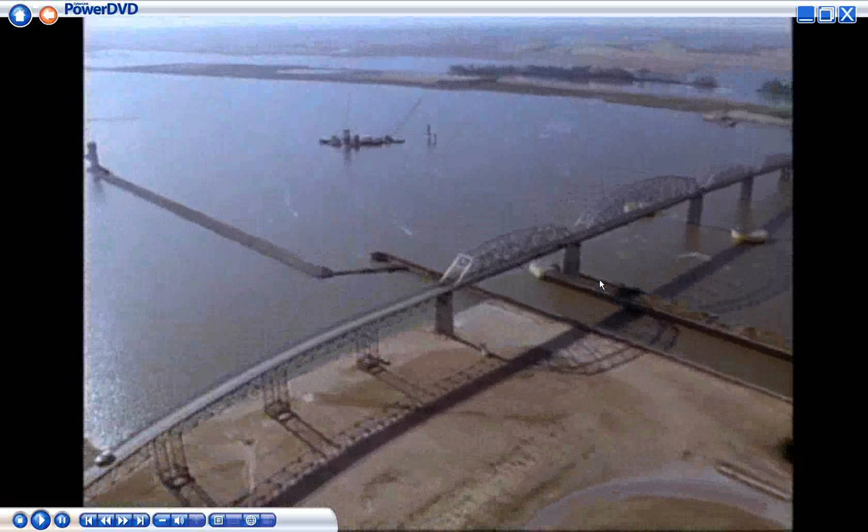For nearly 70 years, the old Clark Bridge was the most direct route from Alton, Illinois to St. Louis, Missouri. But the old bridge had become a bumpy traffic bottleneck. Everyone agreed a new bridge was needed. Building a bridge across the mighty Mississippi would require expert project management skills.

Projects are special operations designed to accomplish a set of objectives in a limited time frame. Managing projects involves identifying tasks, making time estimates, projecting resource requirements, and preparing budgets, then monitoring progress and revising plans as needed.

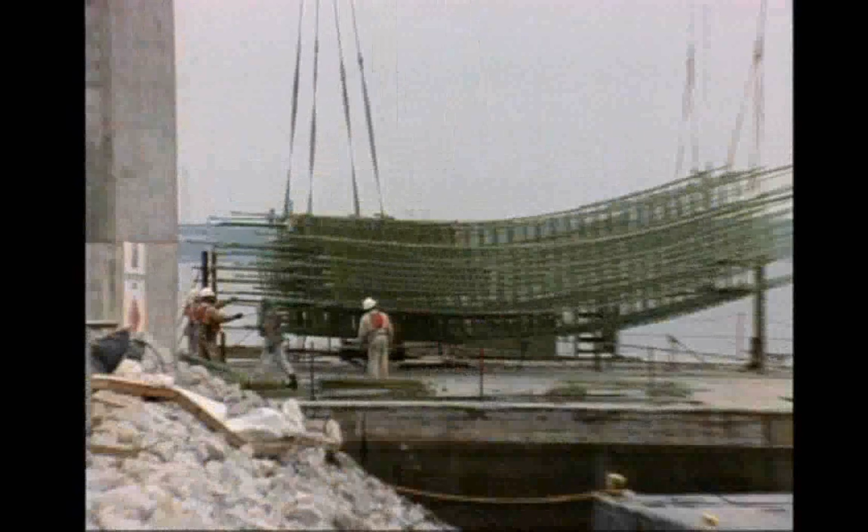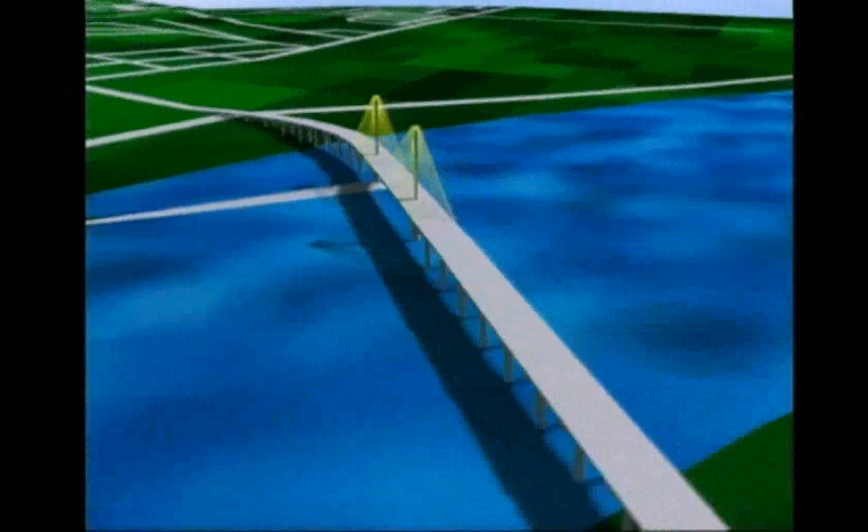Effective scheduling techniques are vital to the success of such a project. Time is money, and the state of Illinois underscores this fact with a $4,000 per day late penalty to its construction contractors. It's also important to organize tasks in the proper order to ensure the project's success.

This project began with the bridge design. The designers chose a cable-stayed span bridge for its strength and low cost. It's a design that had never been attempted quite like this anywhere in the world.

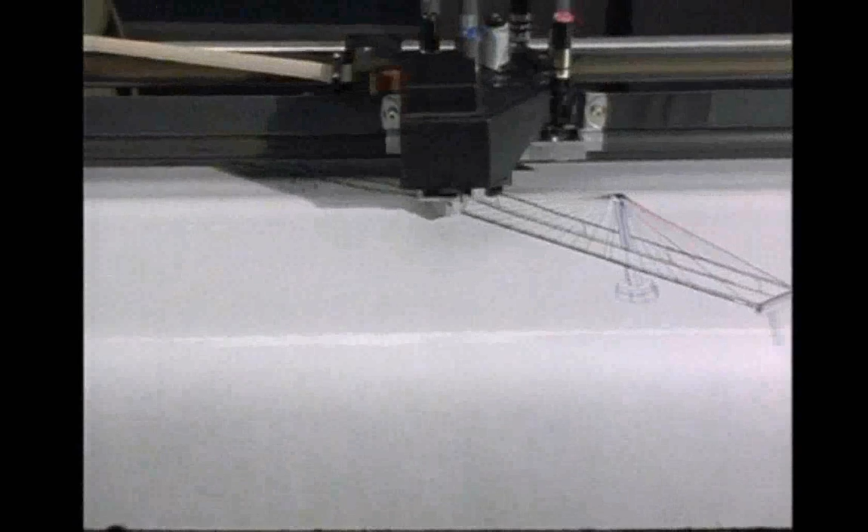Before construction could begin, the state had to break down the job and award contracts. Work breakdown structures help project managers determine exactly what needs to be done so that they can estimate how long it will take. A hierarchy of activities is established.

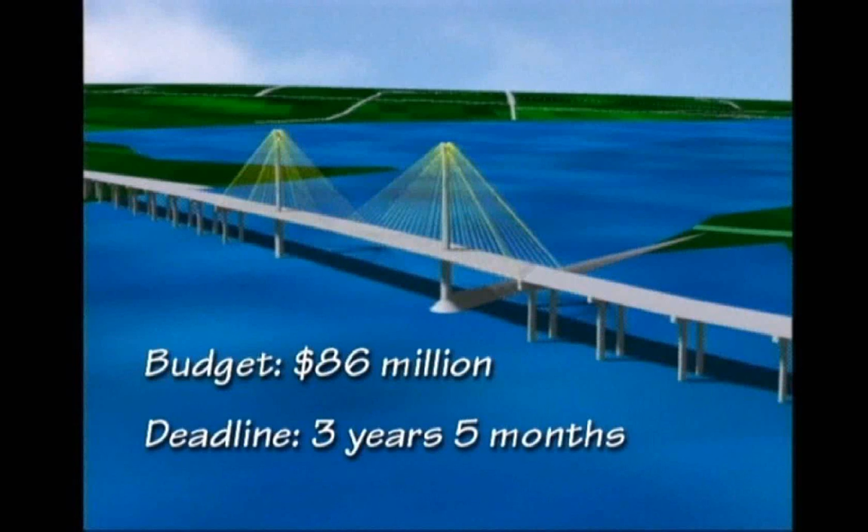In this case, the state divided the bridge up into sections and awarded each section to a different contractor, which encourages more competitive pricing. The total budget for the bridge was $86 million, and the deadline was 3 years and 5 months away. Bridge construction presents special challenges.

Working over water is one of the toughest things you can do. You have to plan every morning, which we do. We meet every morning with the staff for just a few minutes because you can't just walk out and take something or drive out and get somebody. Everything has to be maneuvered by tugboats and barges.

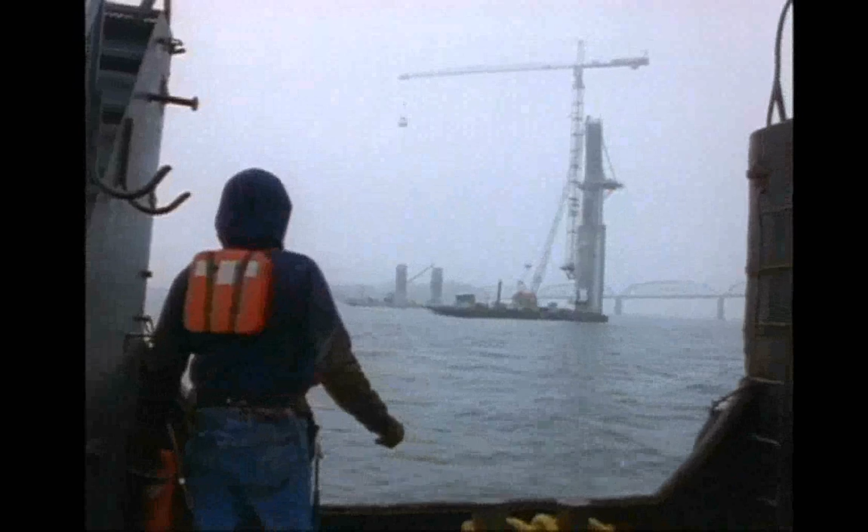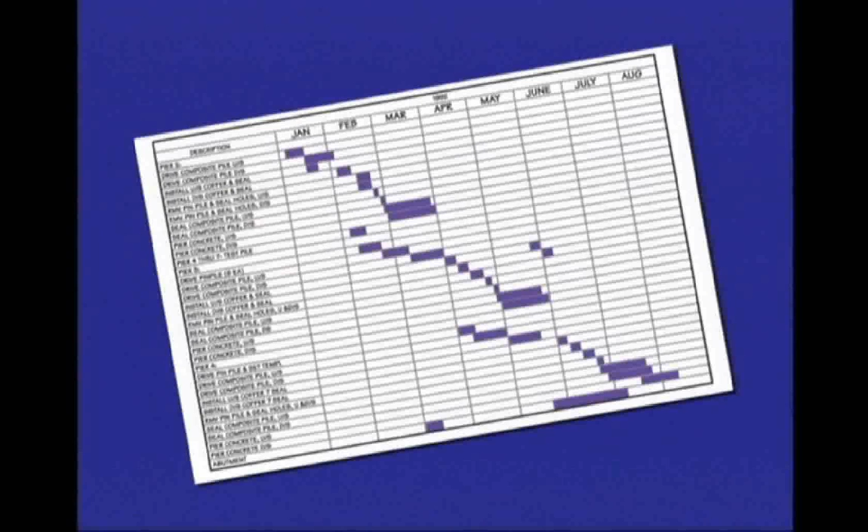When undertaking such a large project involving thousands of tasks and multiple contractors, scheduling becomes a critical element. One of the most popular techniques for scheduling is a Gantt chart. The Gantt chart uses layers of timelines indicating activities, durations, and dates.

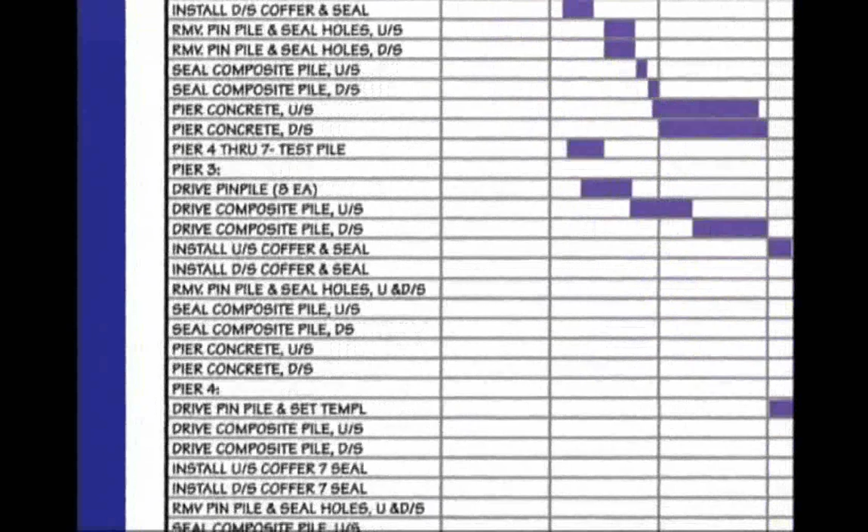This Gantt chart was created by Massman Construction to schedule work on the Missouri approach. The state of Illinois required each contractor to submit Gantt charts in their progress reports.

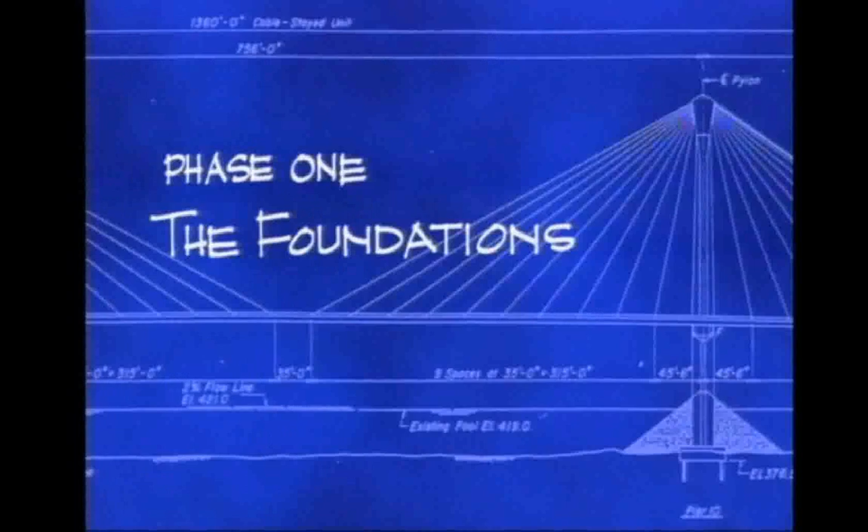Construction of the bridge began in the center of the river, grounding a foundation frame and enclosing it with steel walls to create an enclosure called a cofferdam. Then it was filled with reinforcing steel and concrete.

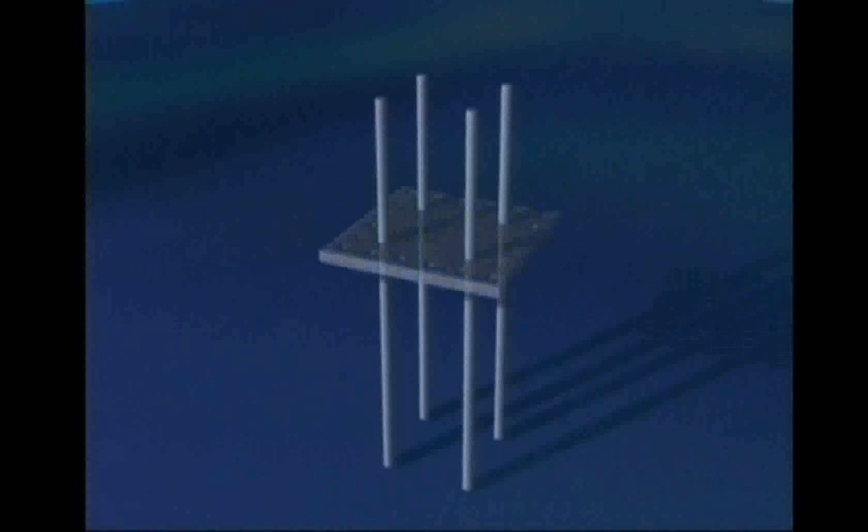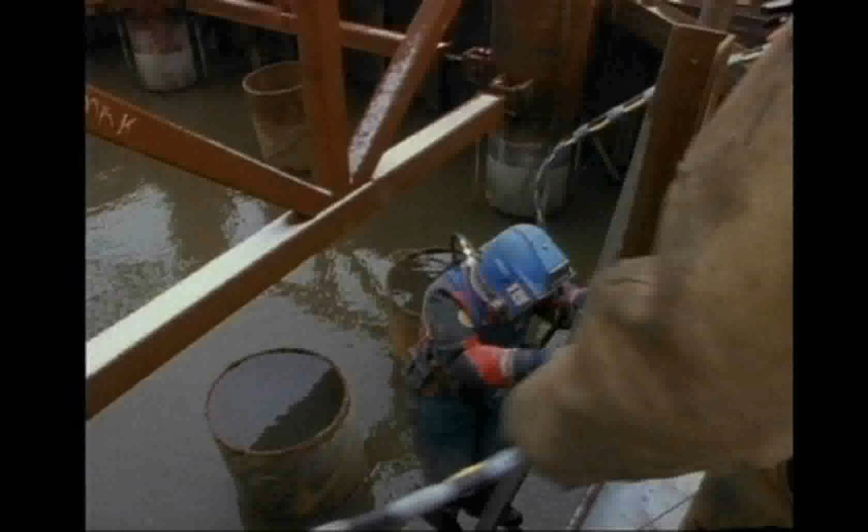The Missouri approach required a rather unconventional foundation, one built on stilts to avoid the dangerous high pressure in the deeper water. Unusual tasks like this are more difficult to schedule and budget, especially when so many unforeseen things can go wrong. The holes in the bottom of the cofferdam needed to be plugged by divers.

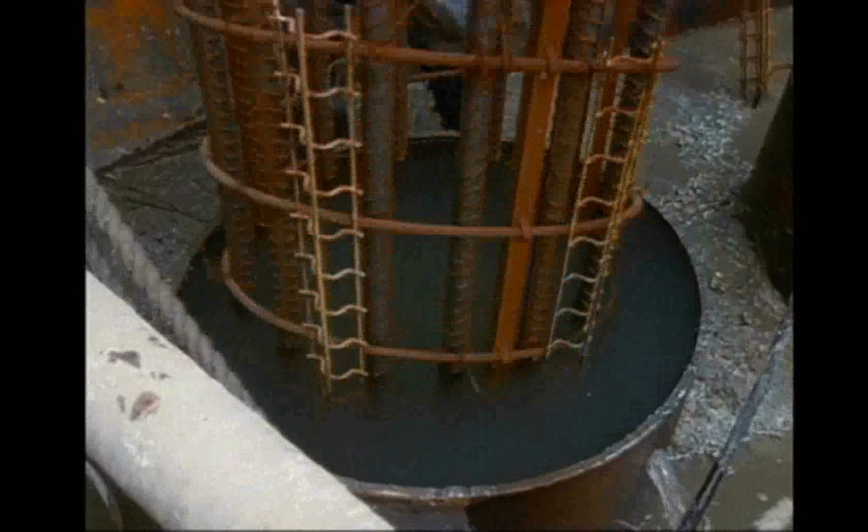Work hit a snag when sections of reinforcing steel were dropped in a 30-inch steel piling. Divers worked all day to fish these sections out of the bottom of the 60-foot deep tube. This was one of many bumps in the bridge's schedule.

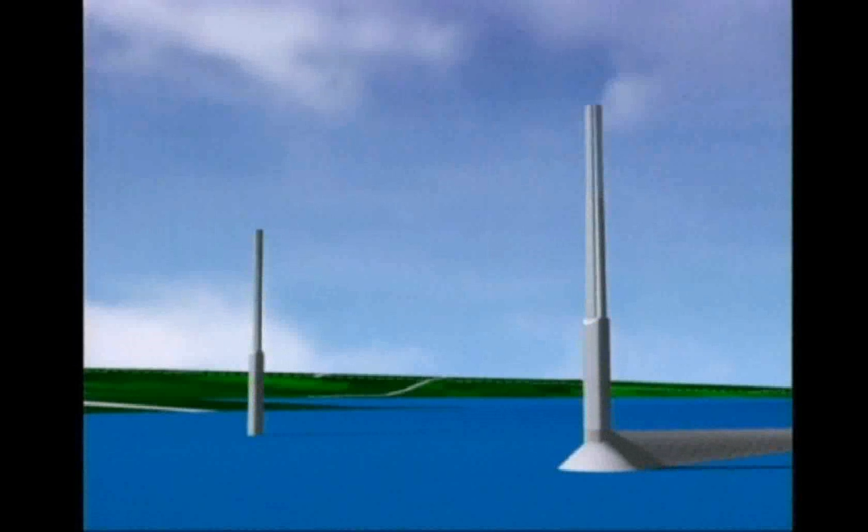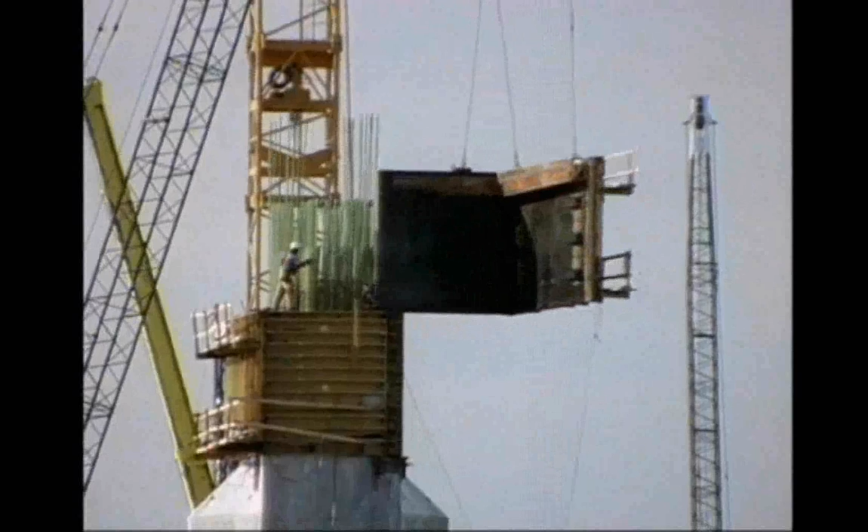When the main span foundations were finally finished, it was time to build the 300-foot towers. McCarthy Brothers Construction had less than 1 year to finish them. Each morning the crew was taken by barge to the site. In 3 months the towers were 70 feet tall, increasing the exposure of the concrete forms to the fall winds.

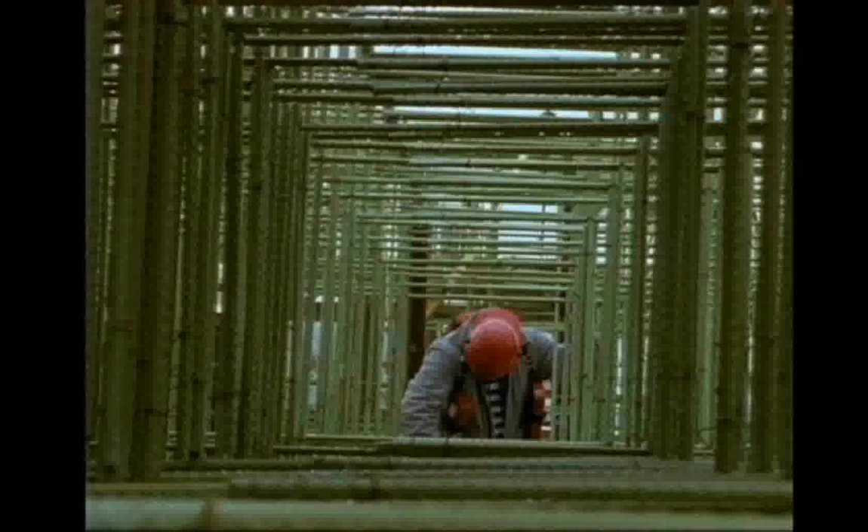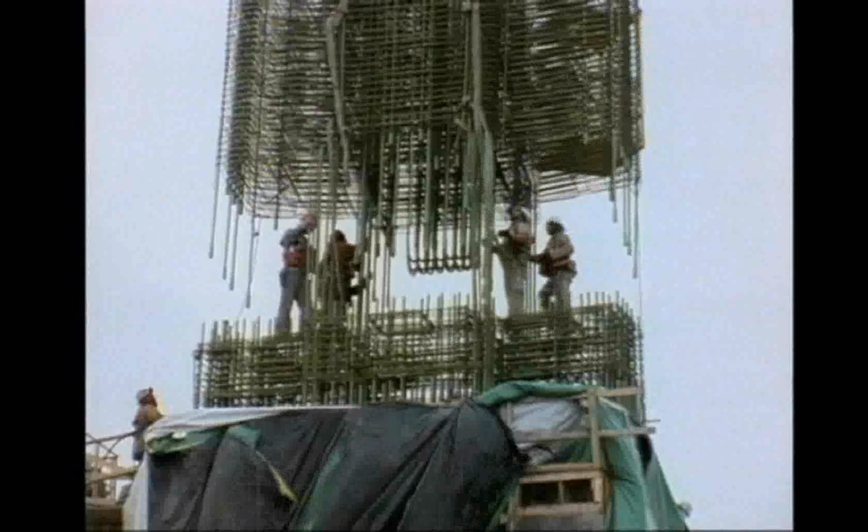Though the winds stopped work on the towers, construction continued independently on the ground, where the crew assembled the tower's reinforcing steel. Specifications for the custom tapered towers required different measurements for each steel bar, which took extra time. They carefully moved these heavy forms into place, spliced each bar to its mate, and poured another higher section of concrete. But this concrete failed the state's quality test.

I took a hammer and chipped some of the concrete off the surface, and I noticed that it was very soft, it was very lightweight. I took a sample down with me to the field office, and I noticed it was so lightweight it would actually float on the water.

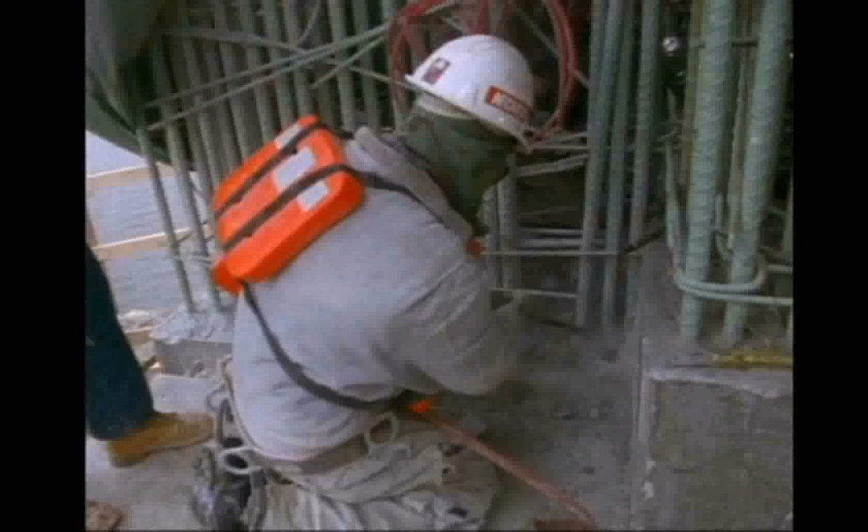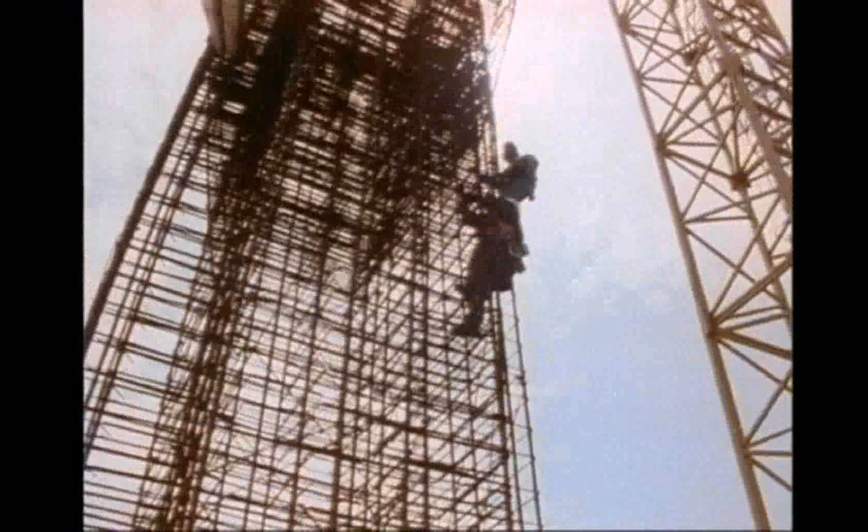More than 215 cubic feet of concrete needed to be removed, and fast. All tower work was shut down. The natural reaction was to rush to catch up, but that can be dangerous. And late in the year, the fall weather increases the danger and the delays.

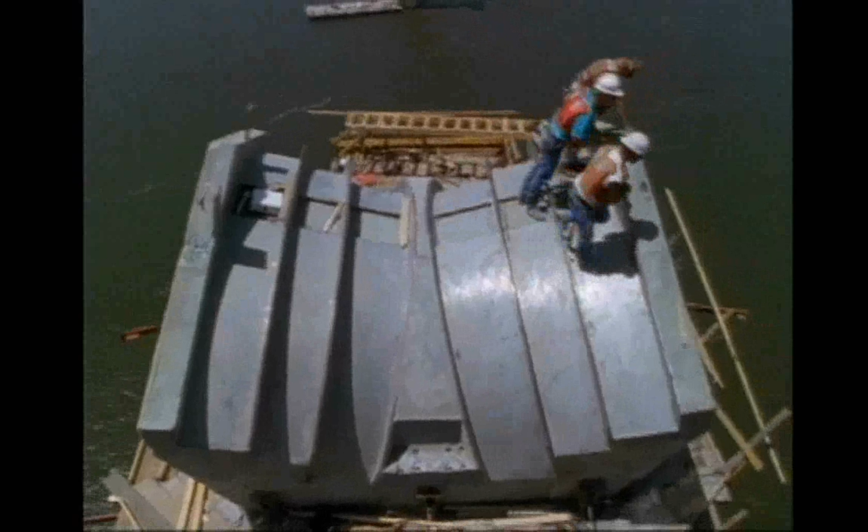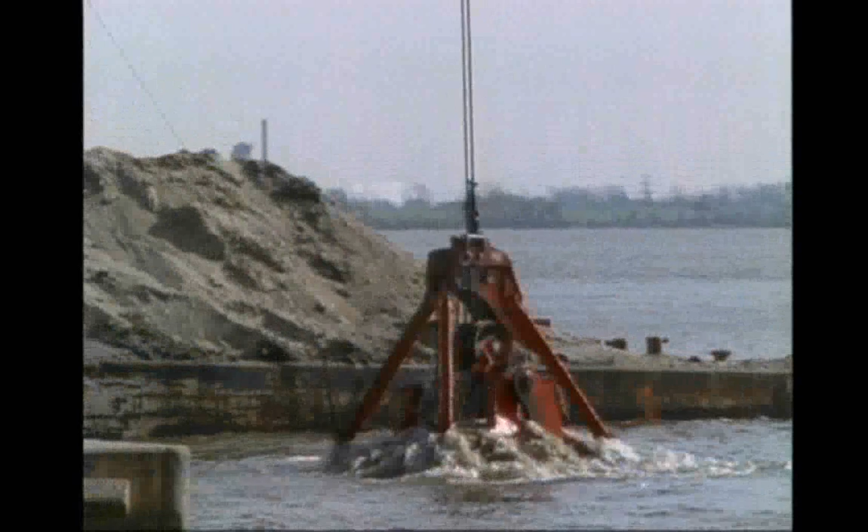Spring finally arrived, and the cable supporting crowning sections were added to finish the towers. The Illinois Approach contractor got a late start. Then a crane tipped while trying to lift an oversized load. They fell further behind when the excavator hit an old sunken barge while excavating for the underwater foundations. They decided to cut a huge steel square out of the old barge to make room for the foundation. The schedulers, in turn, had to make room for this costly delay.

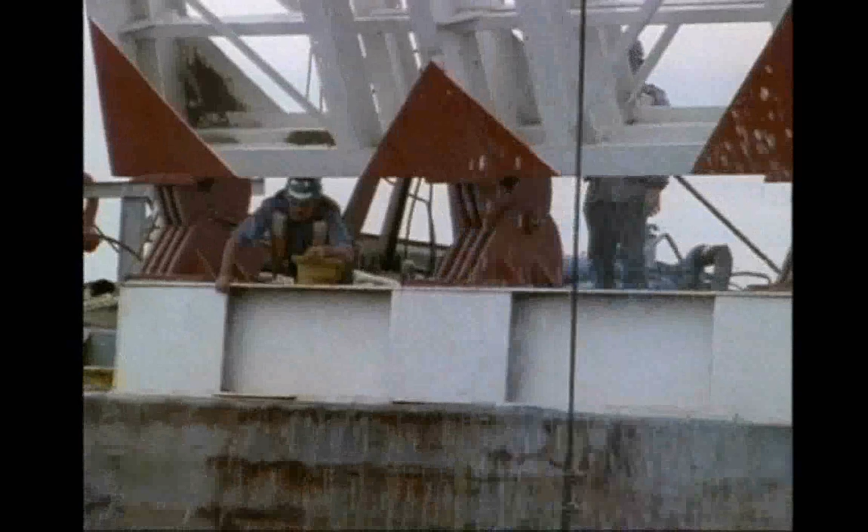When the stakes are this high, accurate scheduling can save millions of dollars. PERT, or Program Evaluation and Review Technique, and CPM, or Critical Path Method, are two of the most widely used techniques for scheduling large, complex projects. They display the sequential relationships among activities and reveal which activities must be completed on time.

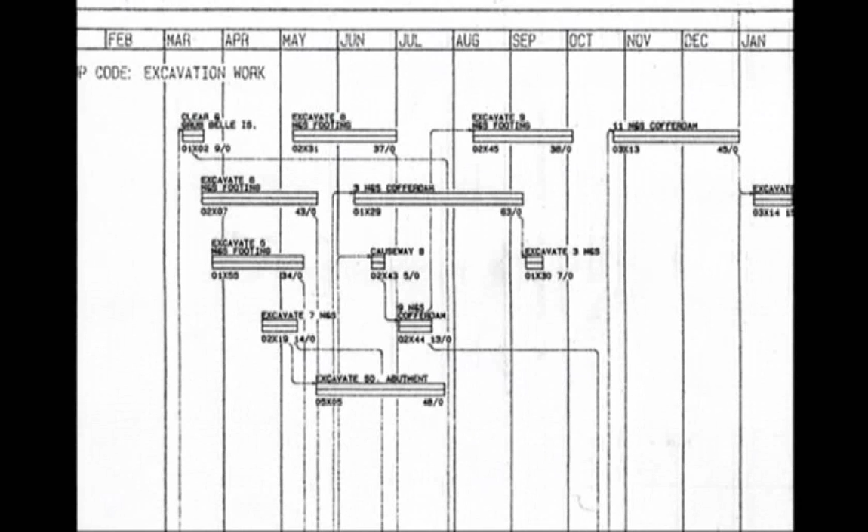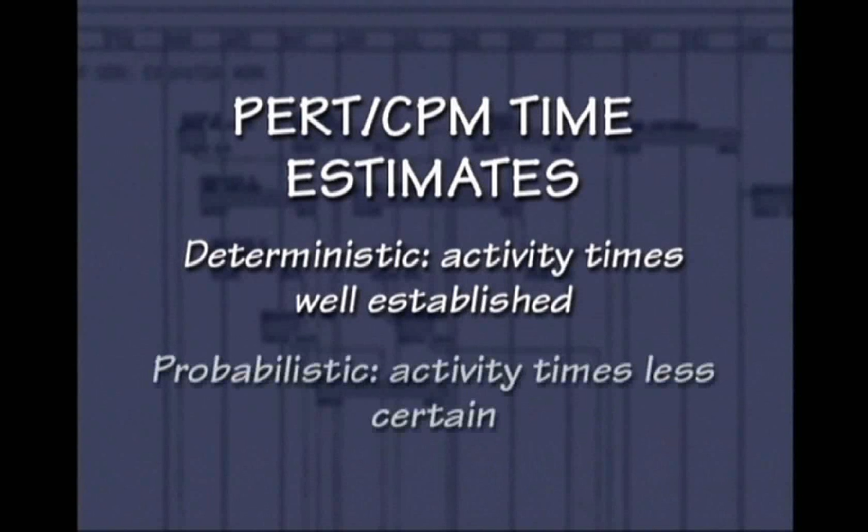Both PERT and CPM use deterministic and probabilistic time estimates. Deterministic estimates are used when activity times can be fairly well established, while probabilistic estimates are used for activity times that are less certain. They're useful in coping with unpredictable winter weather and untested procedures, such as installation of the bridge's innovative cable stays.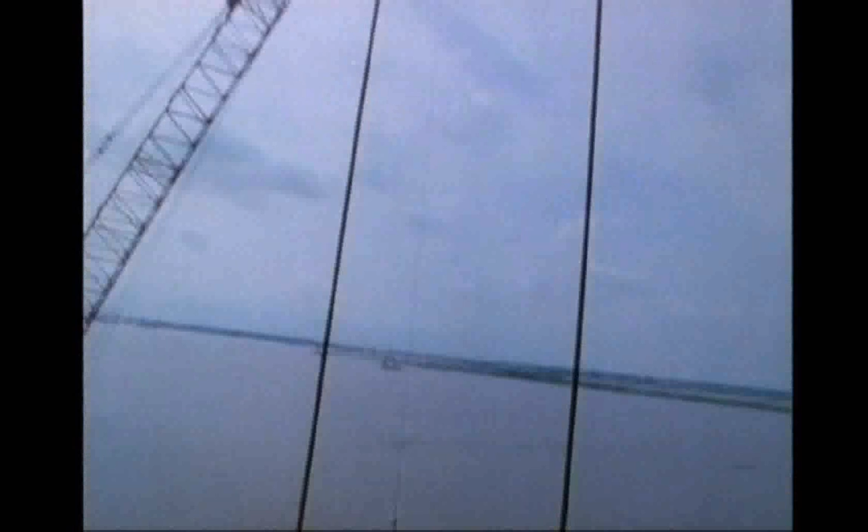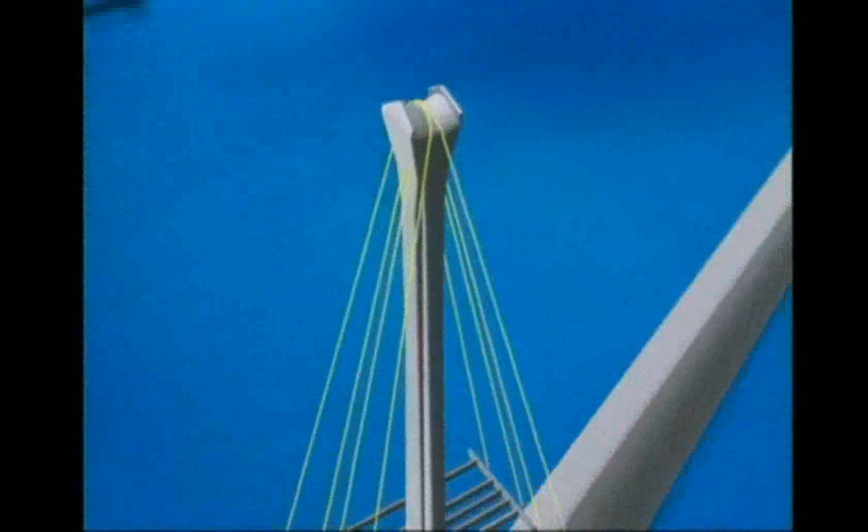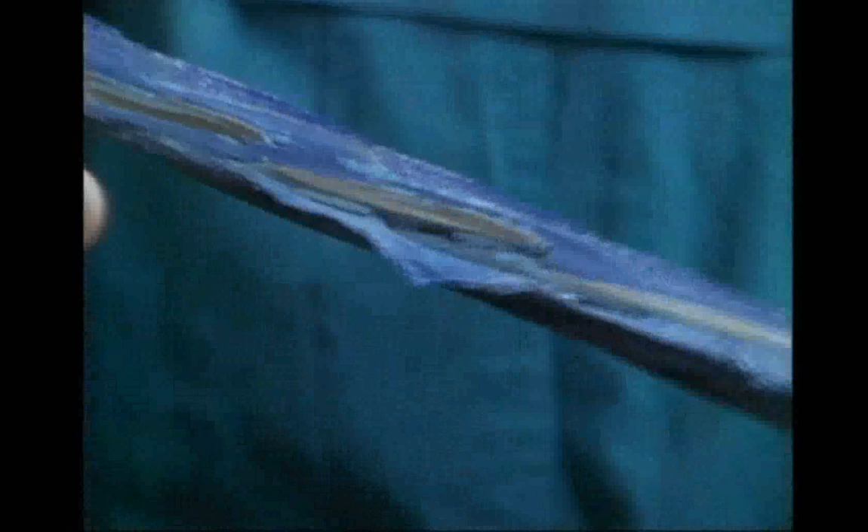In the summer, 2 years after the construction began, it was time to install the bridge's 112 miles of cable stays. The untested techniques they used for the installation proved costly. We took it apart and looked at it, and this is what we found. This coating that's on the cable stays is very abrasive, and as one cable was pulled across the other, it actually cut into the cross-sectional area of the steel itself, which would detract from the strength of the cable.

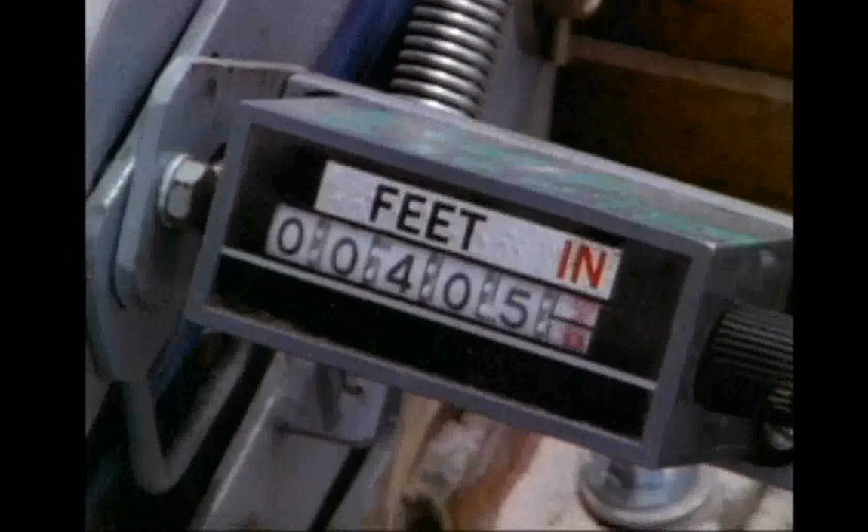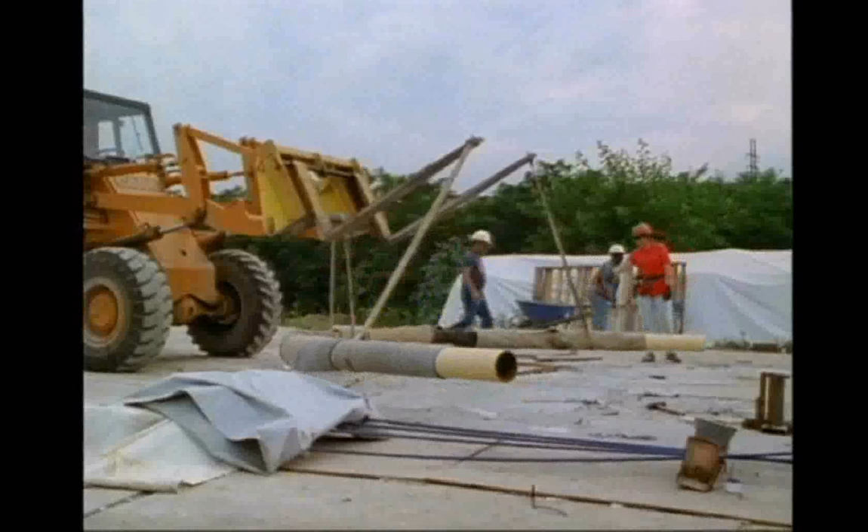Before the problem was finally resolved, a month and a half was wasted, as well as thousands of feet of cable. Now we have developed a system of pulling the cables out individually and then putting them all together and pulling all of them together through the banana pipe. So they only make one trip through the banana pipe and they don't wear on each other.

Everything was then ready for the building of the road deck. Sequential relationships are obvious here. They couldn't build the road deck before the towers, or the towers before the foundation. A similar sequence relationship was involved for road deck construction. First, they scheduled for installation of the steel girders, and then concrete roadway slabs.

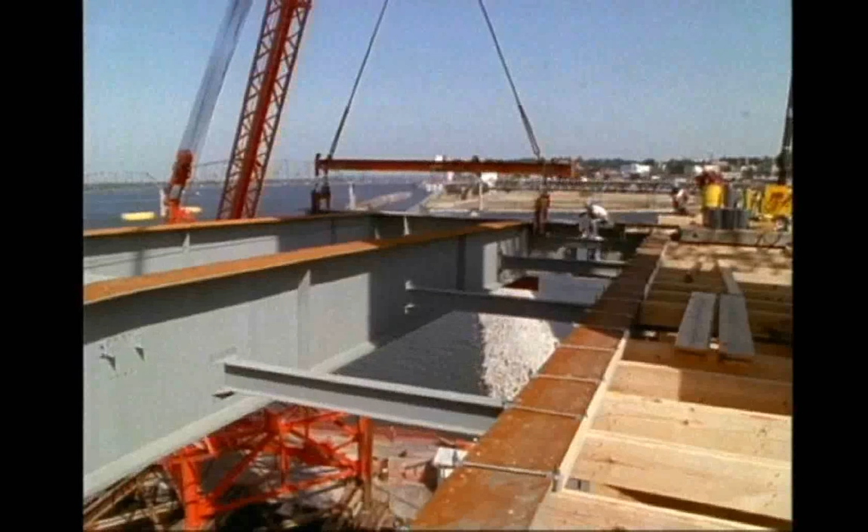As the road deck grew, disaster loomed. A section of the cable failed corrosion tests, threatening major rework for cable replacement. But the problem was an anomaly, and most of the rest of the cables were approved, to everyone's relief. With much of the road deck in place, it was time to close the gaps, and the bridge was vulnerable to weather damage until the gaps were closed. Surveyors had to check for movement of the two sections and for proper fit.

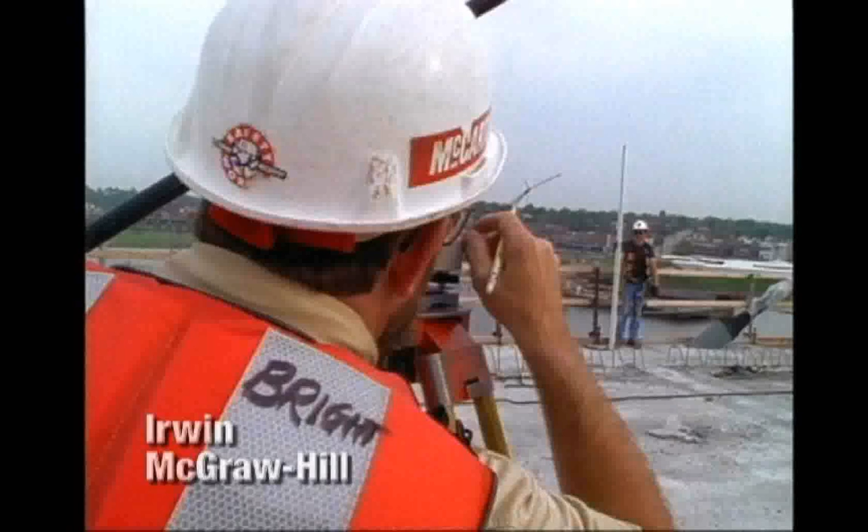The crew rushed to fit the final girder before the midday heat expanded the bridge. It fit, and everyone was feeling optimistic. All of the problems had been solved to that point. One thing about this structure, for the size of it and for the dollar cost, which is right at $85 million, there haven't been any major problems that we couldn't solve. My boss said this could well be the first bridge built across the Mississippi on budget and on time.

But then it rained, and rained, and really rained. The construction site was underwater. The flood was the worst in 500 years, with dozens of people dying and billions of dollars in property damage. Little work could be done until the waters finally subsided in mid-September. Schedules and budgets required major revisions and crashing.

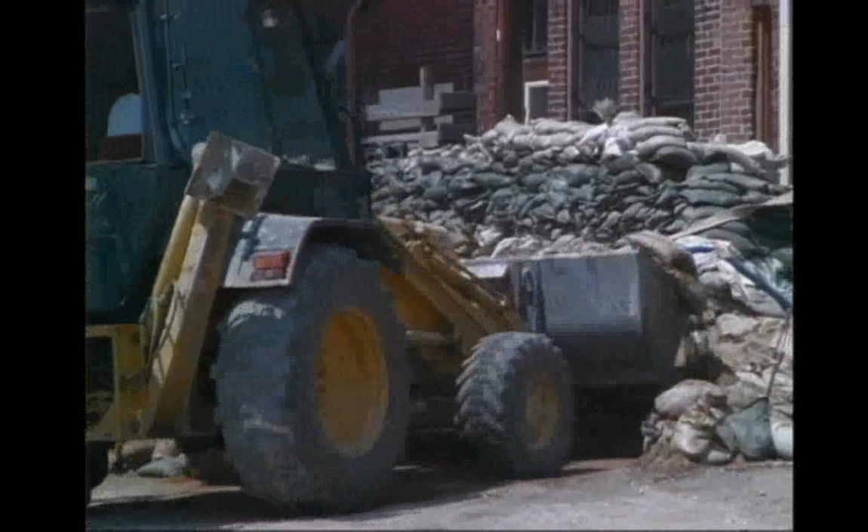Crashing is a scheduling technique for shortening normal schedules through the use of additional resources or by transferring resources from other activities. The big question is, when does the cost for the time saved exceed the benefit? As work resumed, schedules were crashed in various ways. It was a race to the finish, with crews working 16-hour days.

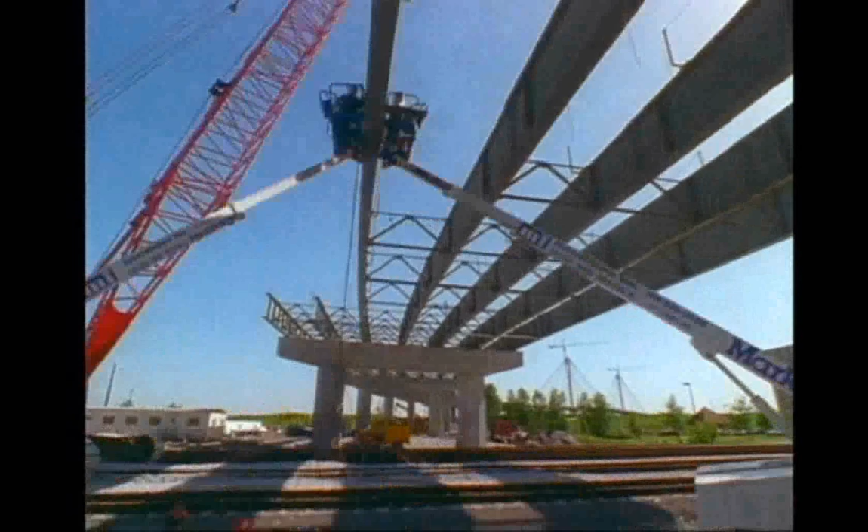Trouble on the old Clark Bridge held up the concrete trucks delivering the final loads of special concrete. A suicidal man was threatening to jump, and no one could cross as authorities talked him down. The concrete pour had to be postponed till the next day, but then it was over 95 degrees, which was too hot for the special concrete. The concrete plant mixed in ice with the concrete, and the crew was able to complete the pour.

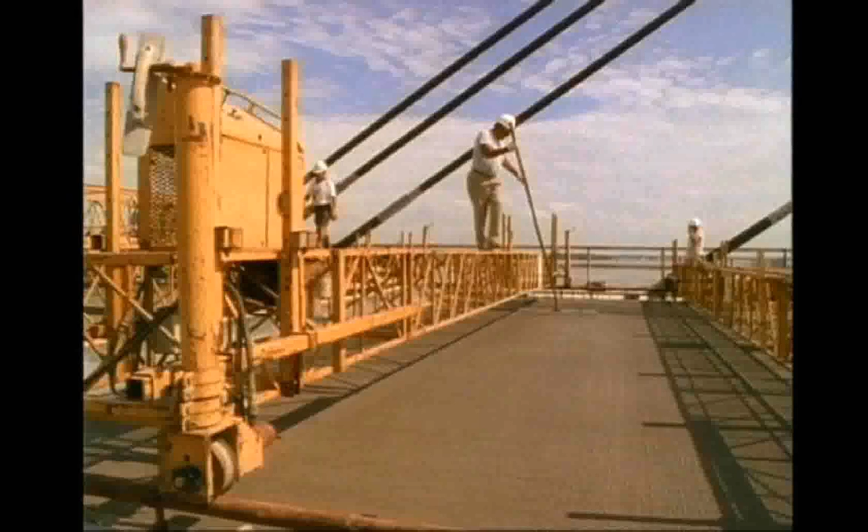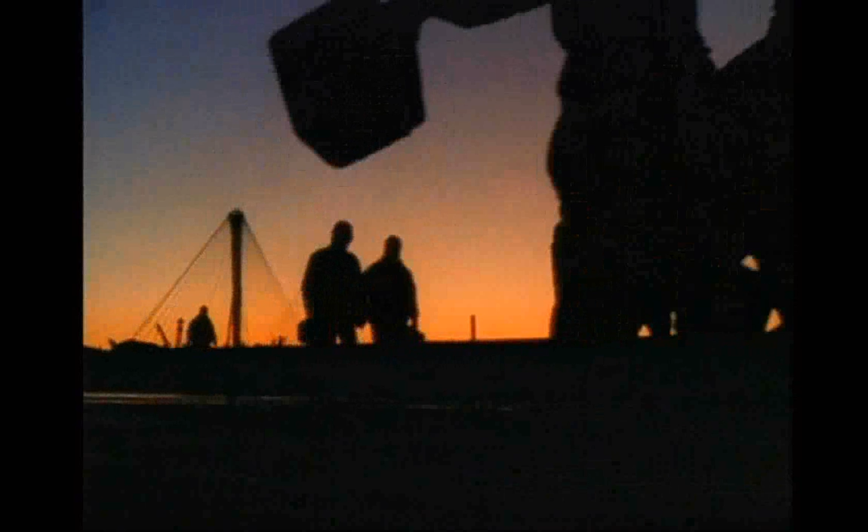With the road deck finished, the main bridge structure was complete, but many details remained to be finished. Finally, on January 4th, after 3.5 years of construction, the crew took one last walk across the bridge. Bottom line, a magnificent bridge was built, and everyone can be proud of their work. The completion was late, but not by much considering the flood, and the budget overage was only 2%.

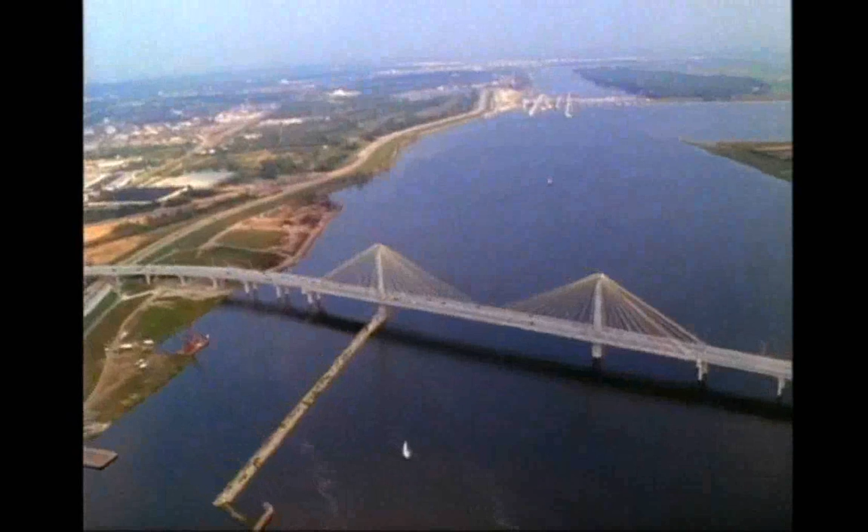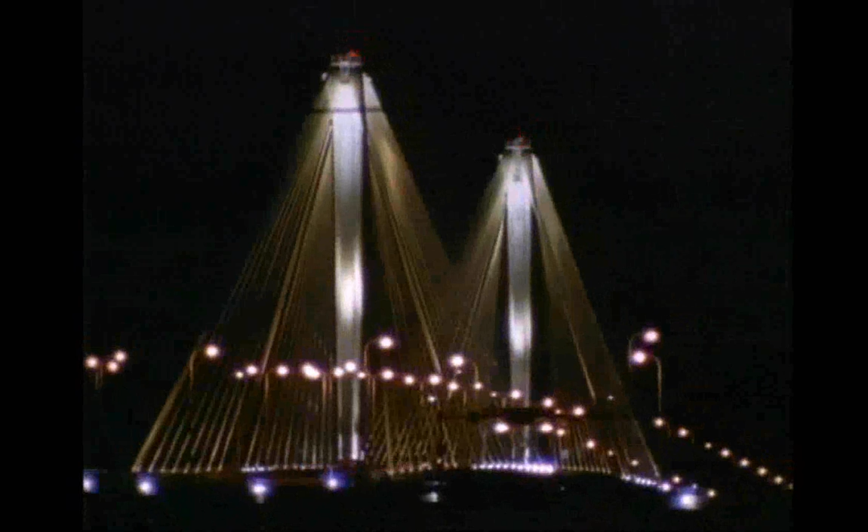Project management techniques like work breakdown, scheduling, and budgeting were critical in every step of the construction, especially for adapting to changes. Project management techniques are very helpful for all types of projects, but they are limited by the quality of the information used. As with most systems, if you put garbage in, you'll get garbage out. The dedication ceremony was a month later and much colder than had been expected, but it was a jubilant occasion nonetheless.